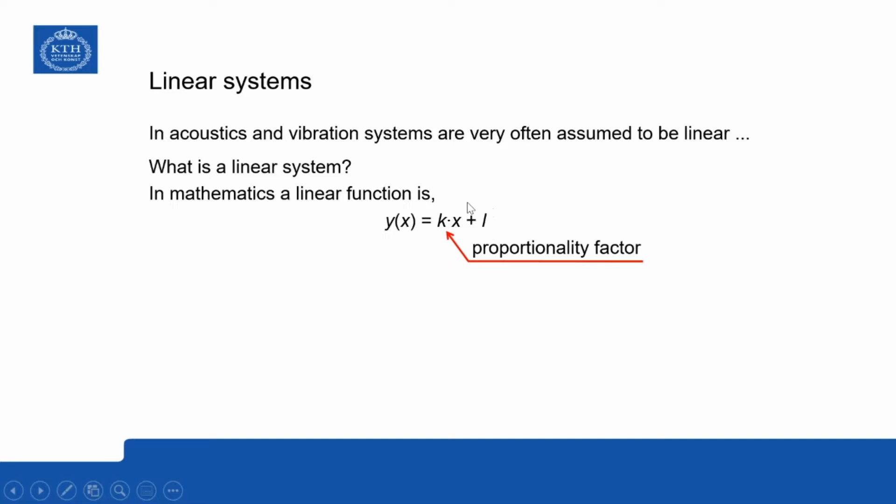And from mathematics, we know that the linear function is defined like this. So we have a function y and the variable x. And the relation between these two is a proportionality factor k and a constant term L.

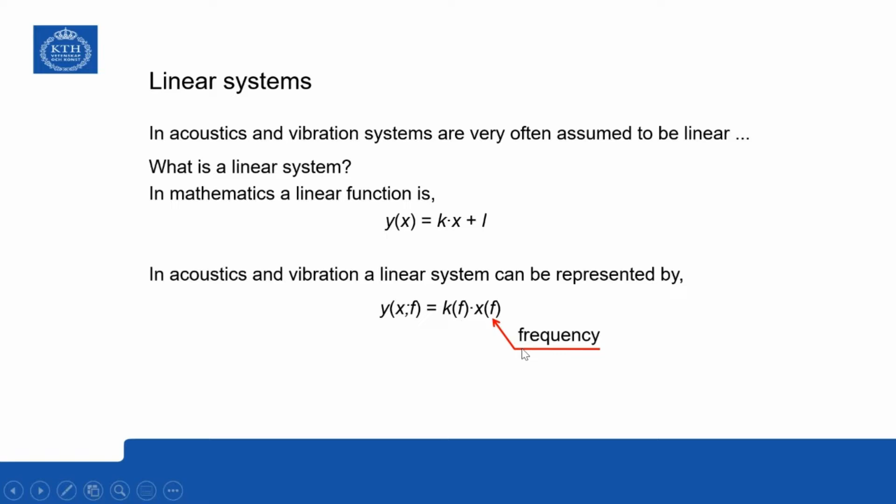So in acoustics and vibration, a linear system can be represented like this. Now we have a parameter, frequency. So all functions, variables, and factors here are frequency dependent. So x here represents the excitation and y the response. And k is a frequency-dependent proportionality factor.

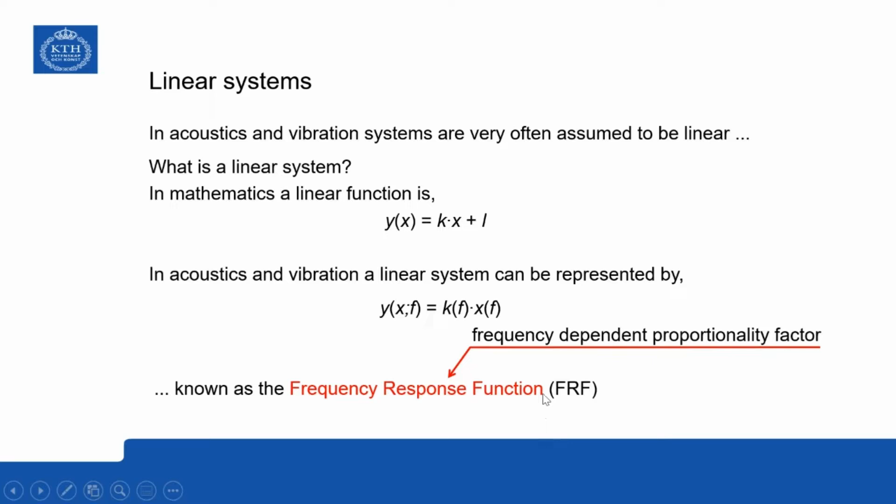Now, in acoustics and vibration, and also electrical engineering, this k here is also known as the frequency response function of the system. FRF is the short form.

So one important property of a linear system is, like we saw in the introduction, the homogeneity or proportionality principle. In mathematical terms, you can express this as follows. If we can suppose that the linear system response to an excitation F is P, then linearity or this homogeneity principle means that the response to an excitation alpha times the original excitation F is alpha times the original response P.

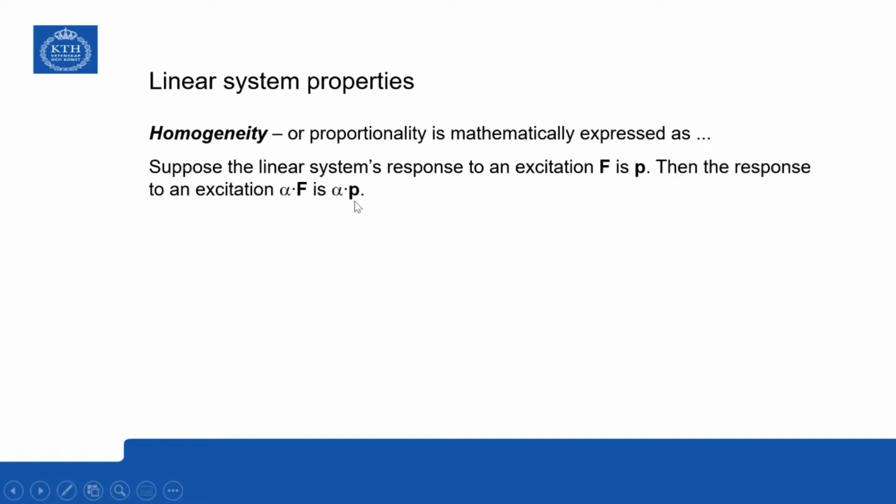For example, let's say we have a machine that vibrates, standing and mounted on the floor. When it's running, it excites floor and wall vibrations in a neighboring room. And these vibrations, of course, will radiate sound waves in the neighboring room. So if we now install a vibration isolation system between the machine and the floor, and by this installation...

...we can reduce the force that excites the floor by a factor 2. Then, if the system can be approximated as linear, we know that the sound pressure caused by this force will also be reduced by a factor of 2. So this is very, very useful information.

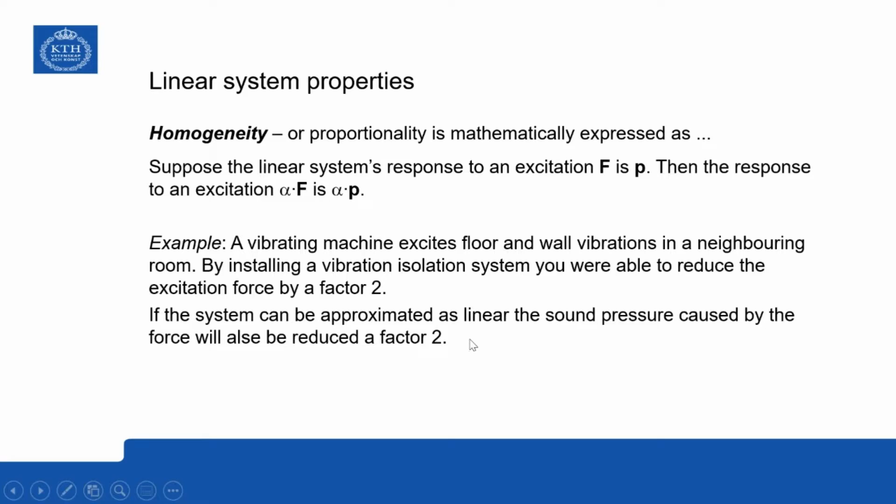A second useful property is what is called the superposition principle. In mathematical terms, we can express it like this. If we have two components of the excitation force, F1 and F2, and we know that F1 causes the response P1 and F2 causes the response P2, then if we have these two excitations times alpha and times beta acting at the same time, simultaneously on the system, then due to the superposition principle, the response will be alpha times P1 plus beta times P2.

And the good thing with this is that we can analyze one term at a time in isolation, and then afterwards sum them to get the total response. So that is the usefulness of the superposition principle. It makes the analysis much simpler.

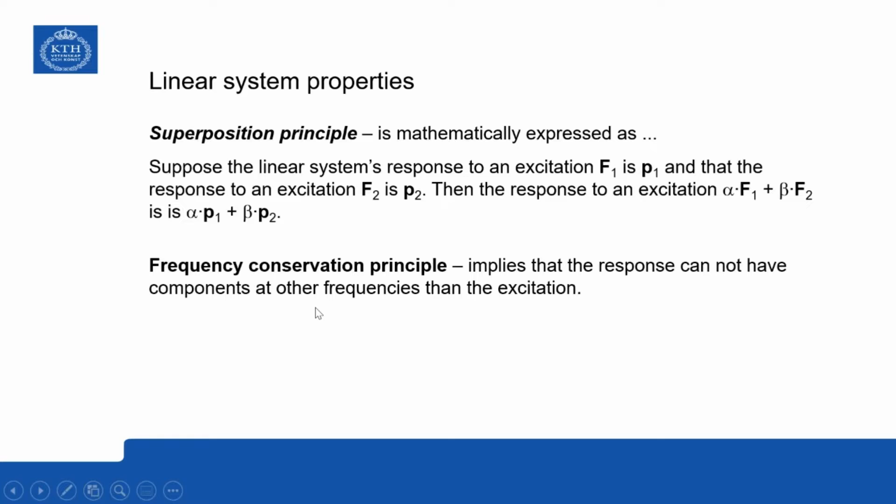The third very useful property is the so-called frequency conservation principle. That means the response cannot have components at other frequencies than the excitation. So if we have a single frequency excitation, for instance at 150 Hertz, then we can only have response at 150 Hertz. No other frequencies can appear in the response. If it does, then we have a nonlinear system or other sources that contribute to the response.

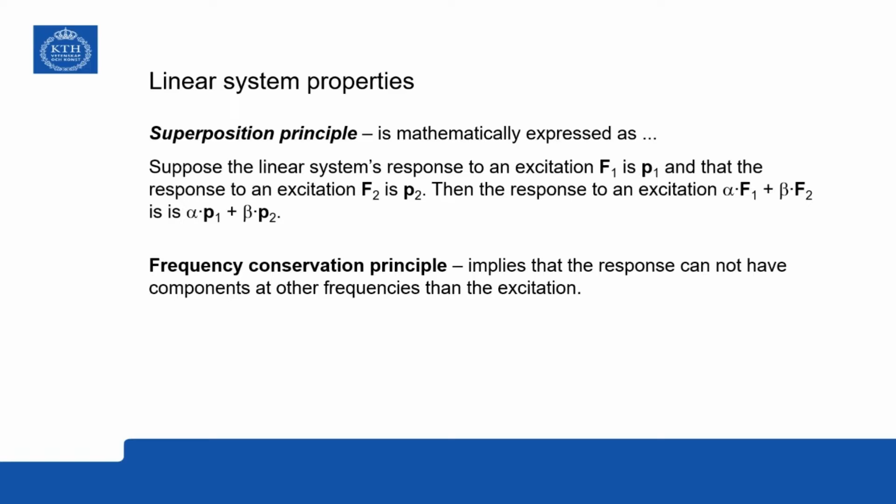As we said before, in acoustics and vibration systems, they are very often approximated as linear systems. So one can ask oneself, when can we assume linearity without introducing large approximation errors due to this assumption? Well, there are two conditions that should be satisfied.

First of all, the oscillation amplitudes must be so small that the constitutive material relations are linear. That means, for instance, that for a solid material, Hooke's linear law, the relation between force and displacement must be linear.

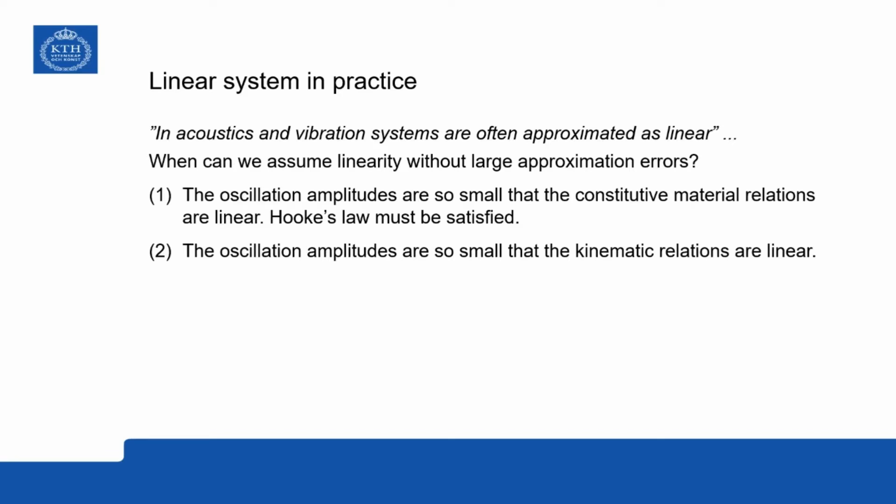Secondly, the oscillation amplitudes should be so small that the kinematic relations are linear, or can be approximated as linear. So one example illustrating the second condition is the pendulum.

If we have a mass suspended in a string like this, with string length L, and then let this pendulum swing around its resting position here, and write the governing equation of motion, if we derive this governing equation of motion, it will read like this.

As you can see, this differential equation is nonlinear in phi, the angle phi here. The sine here is a nonlinear function.

But if the angle phi is small, if the oscillation is small, then we can expand this sine phi in a Maclaurin series. And if we take only the first term in this Maclaurin series, then we can linearize this nonlinear equation of motion to this shape. And now we have a linear governing equation, and this system, with small oscillation amplitudes, is approximately a linear system.

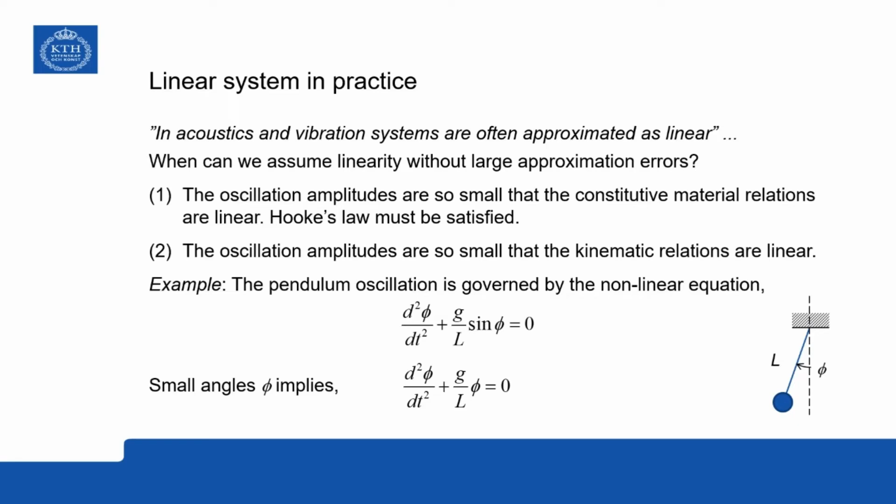So back now to frequency response functions again. As I said before, there are many types of frequency response functions in vibrations and acoustics, and here are some examples.

If we have the excitation in the form of a force, and the response in the form of acceleration, then the frequency response function between the exciting force and the responding acceleration is denoted accelerance, A, with units meters per second squared over Newton. If the response is velocity, we have the mobility, denoted Y. And if you have a displacement response, it's the receptance.

If we take an acoustical example, say we study a vibrating plate and measure or calculate its vibration velocity, and the plate radiates sound which we measure close to the plate in terms of sound pressure, then the ratio between the sound pressure and vibration velocity is the acoustic radiation impedance, Z, in pascals per meter per second.

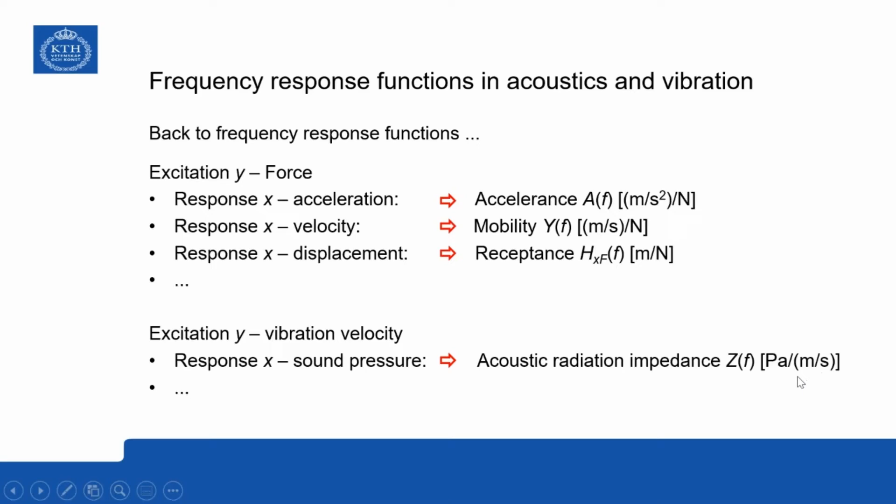And this list can be made much, much longer. The frequency response function can be determined in several ways. You can measure it, and you can also calculate or derive it in a theoretical way from the governing equations. This is one example.

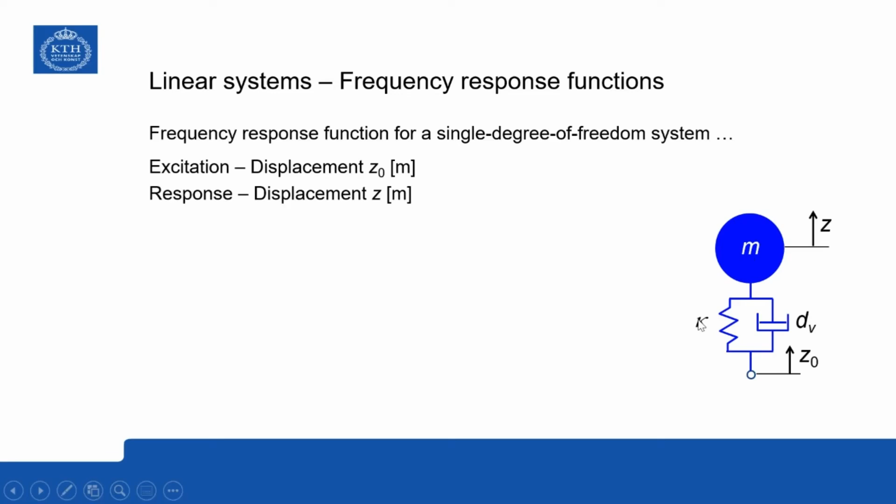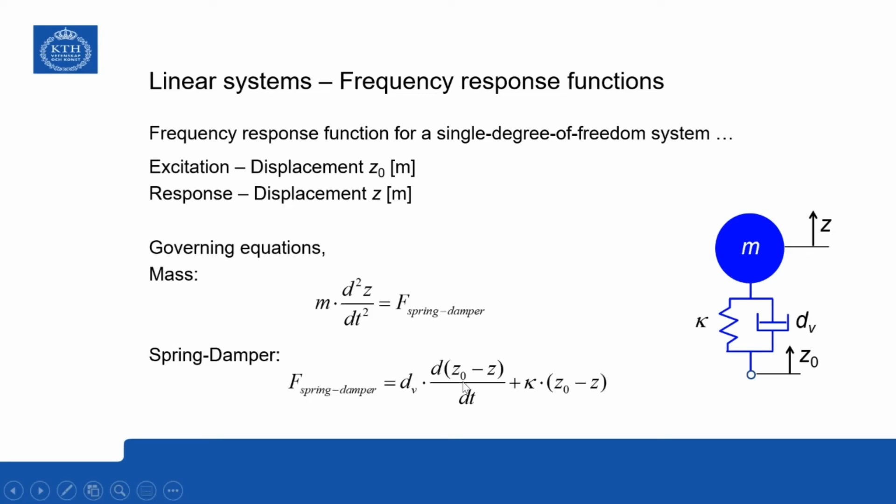Another example for the same, well, almost the same system is if we instead use the displacement Z0 here as the excitation source, and like before, the displacement of the mass Z here as the response. Then the governing equations are almost identical. The only new thing here is that Z0 here is not equal to zero anymore, but we have to insert Z0 here. And if you use these two equations, then the equation of motion will read like this.

And if we then take the frequency response function between the response Z and the excitation Z0 here, we end up with this ratio. As you can see here, the only difference here is this numerator, I dV times omega plus the kappa, the spring constant.

So these two frequency response functions will later on in the course be shown to be useful in many situations. So remember to use them whenever you can.

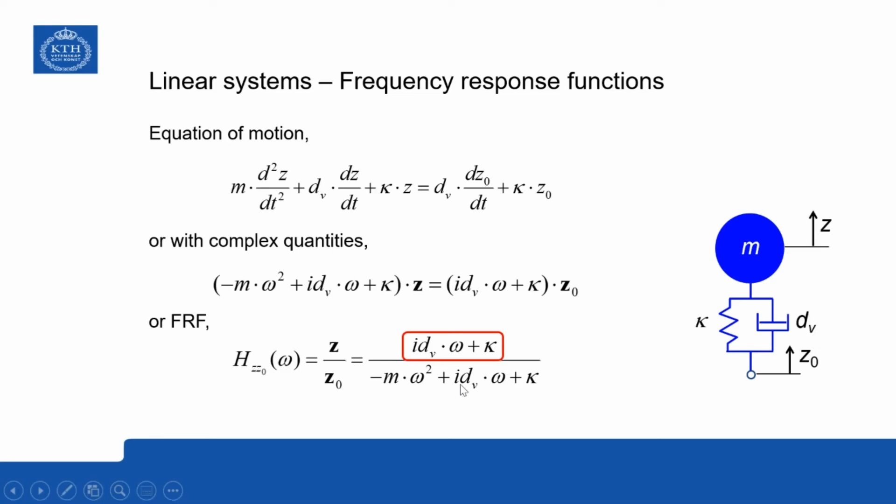So if we now plot this frequency response function, as you saw before, it's complex valued because you have this imaginary unit I here, the square root of -1. So if we plot this in a diagram, it's actually two plots: either the real part and the imaginary part of the frequency response function, or, as we prefer in physics or acoustics or vibrations, the magnitude versus frequency and phase angle versus frequency. As you can see here, the magnitude has a local maximum at a specific frequency. This local maximum, the position of it along the frequency axis, is known as the resonance frequency of the system.

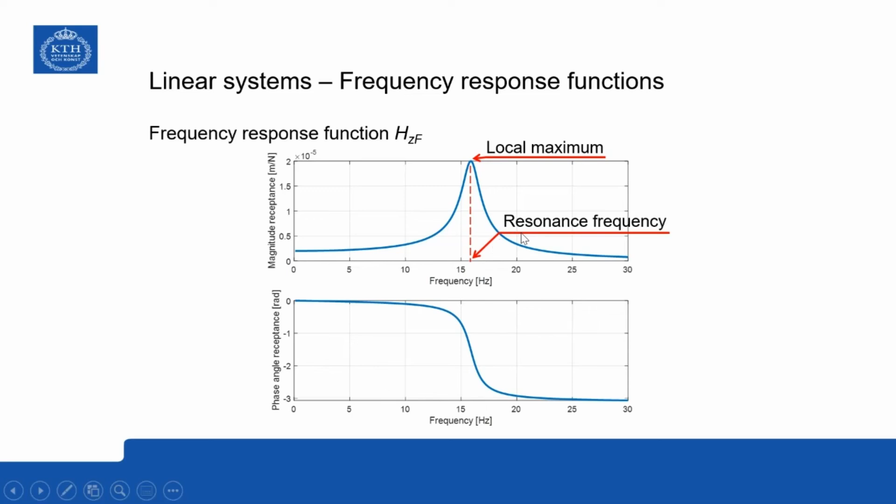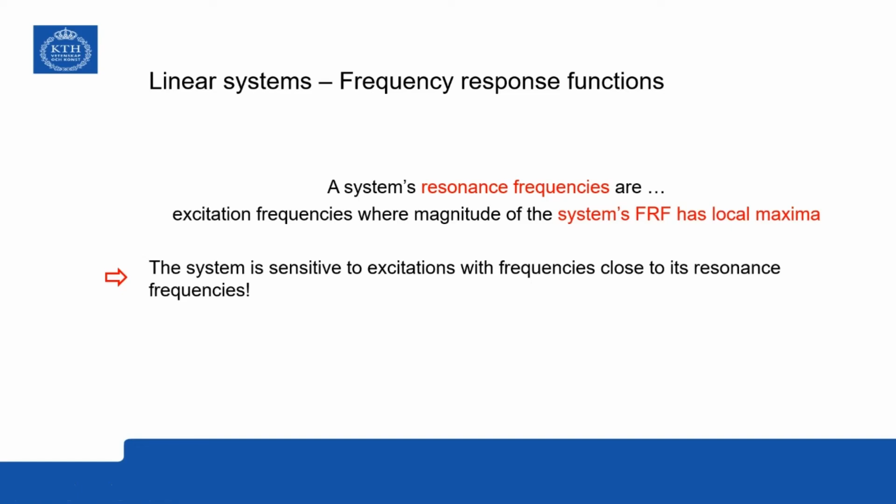As you can understand from this plot, where you have a large magnitude, a large frequency response function, that means that if you have a local maxima of the system's frequency response function, the system is particularly sensitive to excitations that have frequencies close to this frequency, the resonance frequency. So if you want to avoid large amplitude responses, then you shall make sure that your excitations do not contain frequencies close to these resonance frequencies of the system. If it does, then you will have problems.

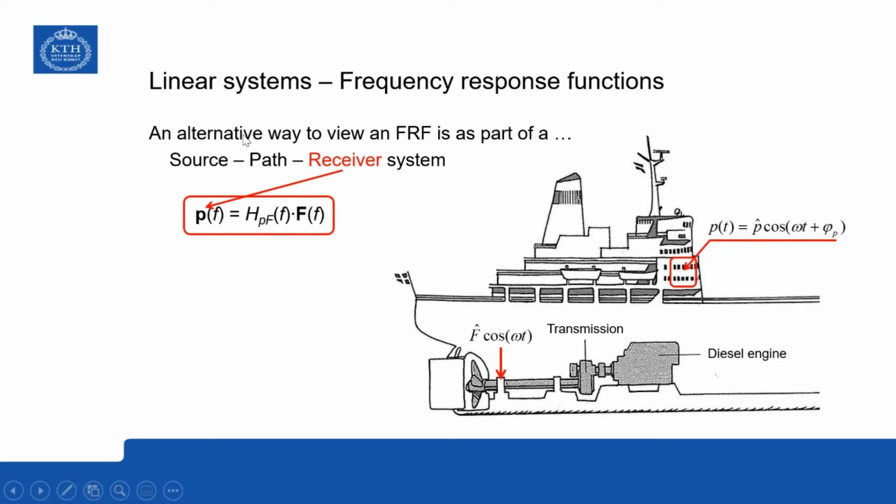So if we express now this system here, this vibroacoustic system, as a linear system, we have the source - that is the forces here caused by the driveline - and that excites vibrations in the ship hull or the connections to the ship hull. We have the path between the source and the receiver in the cabin here. This path is then, of course, the frequency response function between the exciting force and the sound pressure in the cabin. And we have the receiver, the sound pressure in the cabin. So this is another very, very useful way to view a frequency response function, as the path in a source path receiver system.

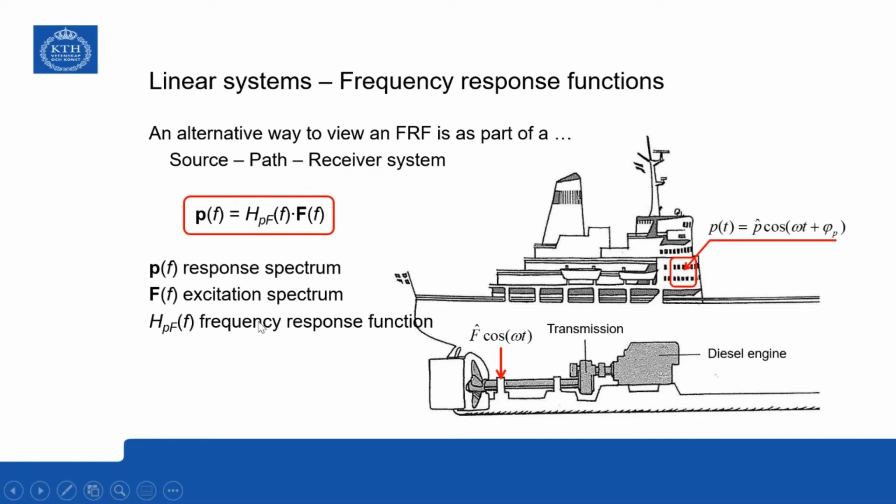And that's all for now. Continuation will follow.